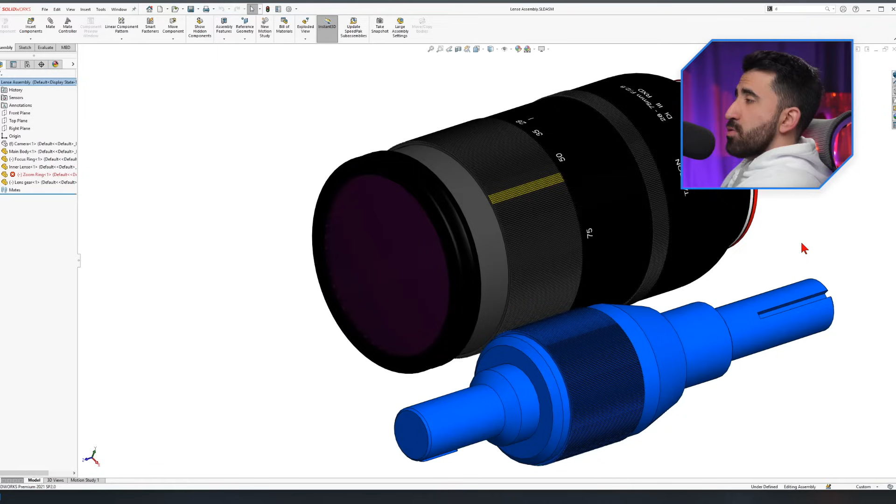Okay, let's go back to the video. Another point of clarification: you might see that I move my components in a smooth manner. It's because I'm using the space mouse from 3Dconnexion, and if you don't have that, it's fine—you can use the middle mouse key on your mouse and rotate it as well.

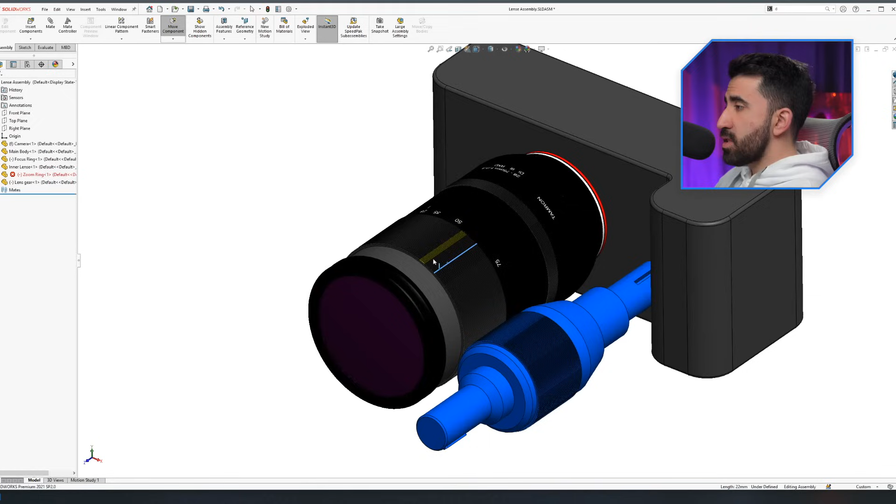Let's just make this part also shown so we know what we are going to do. This is a camera that I have designed and it's functional. The body is just a solid body, we don't care about that. This is the lens, which is assembled of 4 components probably, and we have a focus ring and a zoom ring that rotates. As it rotates, the inner part of the lens goes out and comes in, zooming the camera. I want to show you and teach you how to create an assembly like this. Also, to make things more interesting, I connected a gear to the zoom ring, so by the time you rotate this, it rotates the other one and the mechanism works.

First thing first, what is an assembly in SolidWorks? Unlike the part mode where you actually design a single component, assembly isn't about creating components. It's about adding relations between the already created components you made in part mode. So all you're doing is adding connections.

This is the main reason most beginners make the mistake of saving their assembly and sending just the assembly file to their professor, friends, or someone else to check. A lot of people on GrabCAD make this mistake—they upload the assembly file thinking the whole assembly exists in that file. No, the only thing that exists in the assembly file is the relation between the components.

Without the actual files of the components, that assembly file cannot be opened. So if you want to save it and send it to someone, you have to send all the single components you used in that assembly along with it. Or you use another technique, which is covered in this video.

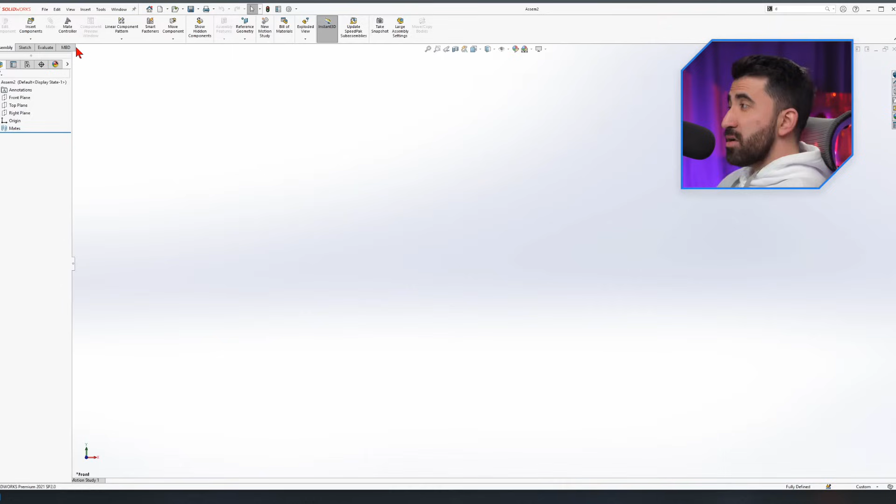This is the environment for the assembly mode in SolidWorks. It's a bit different from the part mode. We have some common tabs like Evaluate and Sketch, but the Assembly tab is now new and we don't have the Feature tab. We still get the front, top, right plane, and origin, and this time we have something called Mates, which is very important and crucial when it comes to learning assembly in SolidWorks.

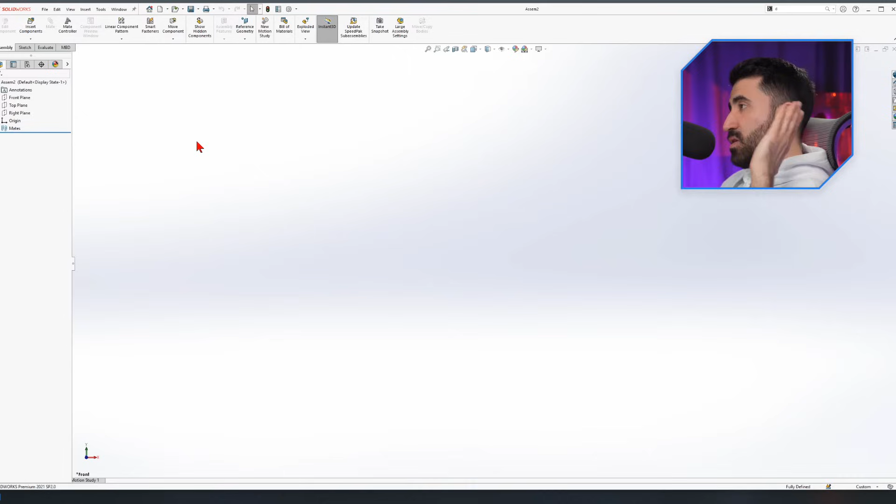Without getting you overwhelmed, there are a lot of icons here that we want to ignore, simplifying it for you as a beginner down to Insert Components and Mates. These are the very first tools you ever need to learn to get started with assembly. Later on, we keep adding other features to it and so on.

So we want to create this lens. Let's start by inserting the very first component. I can go to the Assembly tab and click on Insert Components. When I do that...

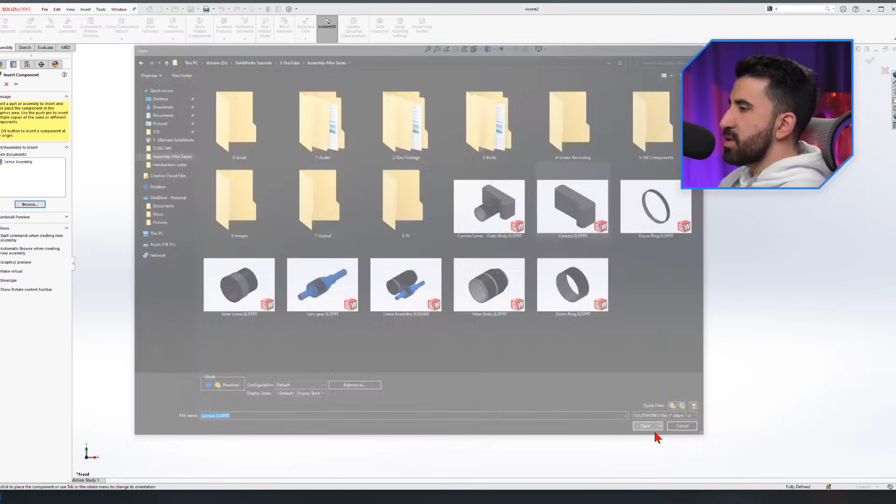I see there is one here, which is the whole thing. I want to insert the body of the camera. So I click on that, click Open, and immediately I see a big component attached to the end of my mouse cursor. When I move my mouse cursor—notice I'm not pressing any button on the mouse, I'm just moving it around—it moves with it.

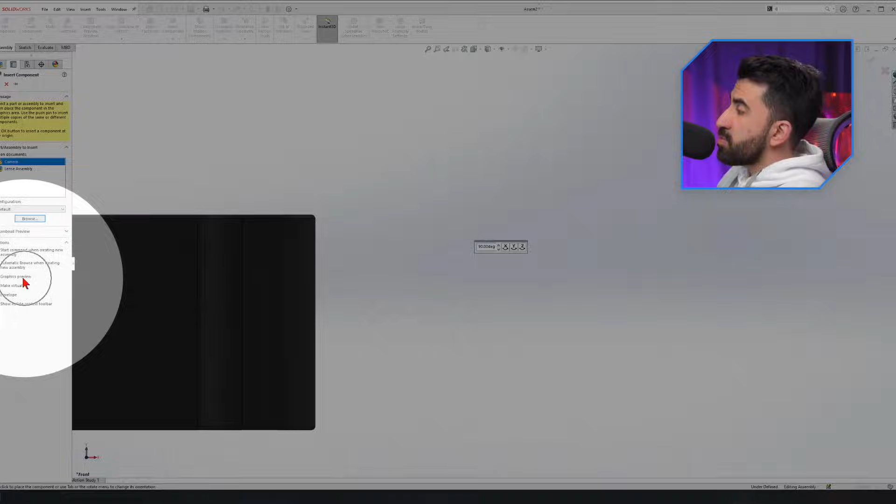If you don't see a component attached to your mouse cursor, it's because you probably haven't checked Graphics Preview over here. If I uncheck it, it doesn't mean it's not working—you just don't see the preview. So you do want to activate this.

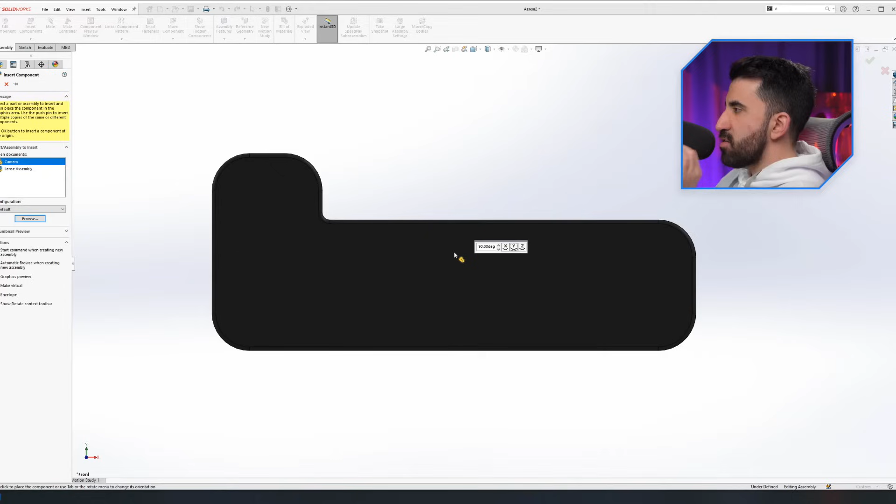I haven't clicked anywhere yet. Bear with me—this is a pop-up that allows me to rotate this component along X, Y, or Z, 90 degrees or whatever degree I define here. I don't want to stick to it, just whatever is fine for this example. Instead of clicking on a random point, which creates a lot of issues, I'm going to move my mouse to the green check over here and click OK.

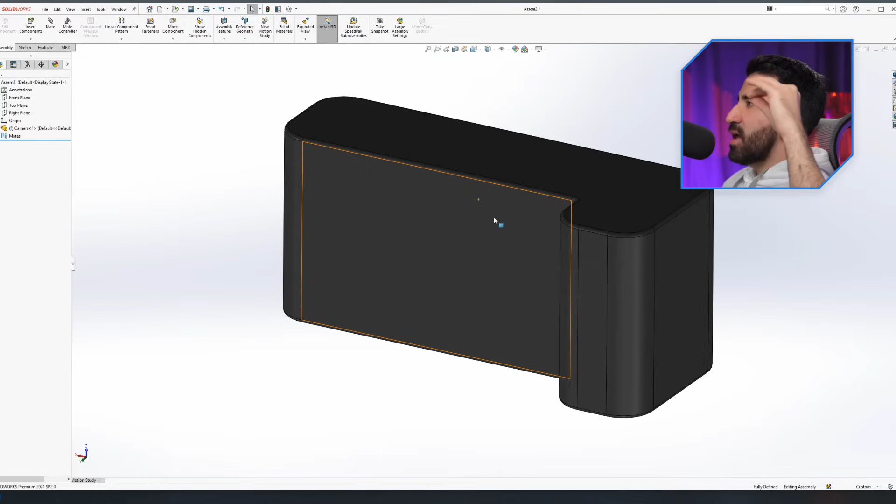By doing so, I have already set the very first component I insert in the assembly mode on the origin, which is how you must do it. Don't click on a random point. Clicking on a random point pinpoints your very first component on random coordinates in the assembly mode, and since you build everything else on top of that part, your assembly is going to be on random coordinates.

While you might think, what's the issue? There are some downsides to it that can show themselves along the line. For example, if you want a plane that cuts your components in half—if you don't know what I'm talking about, go back and watch my SolidWorks mini series in 5 parts.

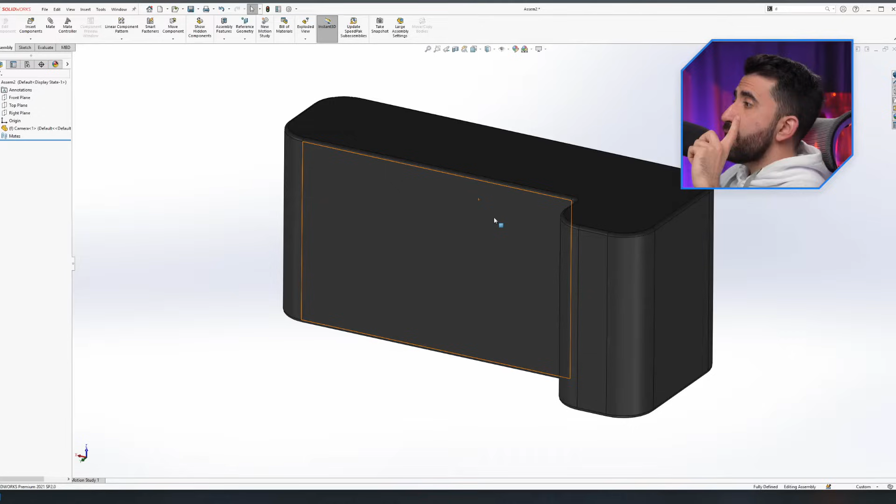I'll put the link to that in the description below if you've missed it. If you want to cut your component in half, you want your component to be on the coordinate system, because all 3 planes cut through the coordinate system. Unfortunately, this part wasn't designed in the right place, so it is not perfectly placed here.

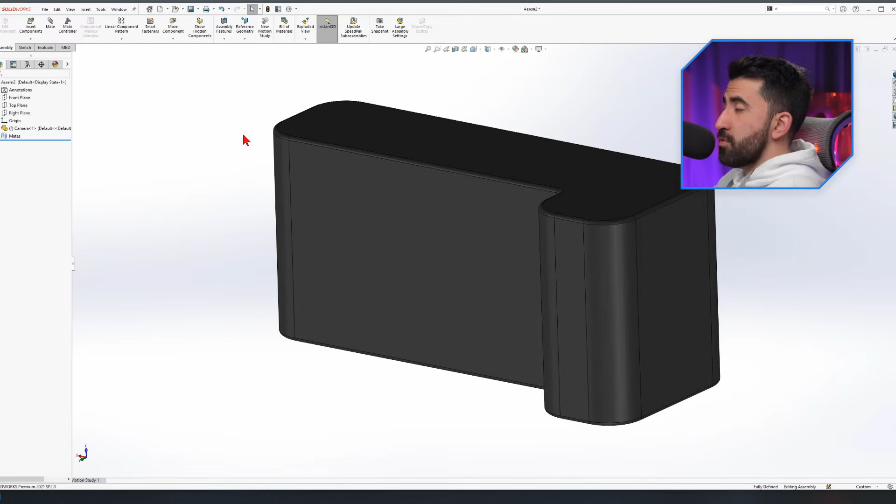But this is nevertheless what you should do. You should click on the green button for the first component. Now I'm gonna go ahead and insert my second component.

I go to browse. This time I'm gonna bring it's called main body. Bring main body, and this time I don't want to click on the green check because this is my second component, and I want my second component to be, for now, on a random point. So I just click here.

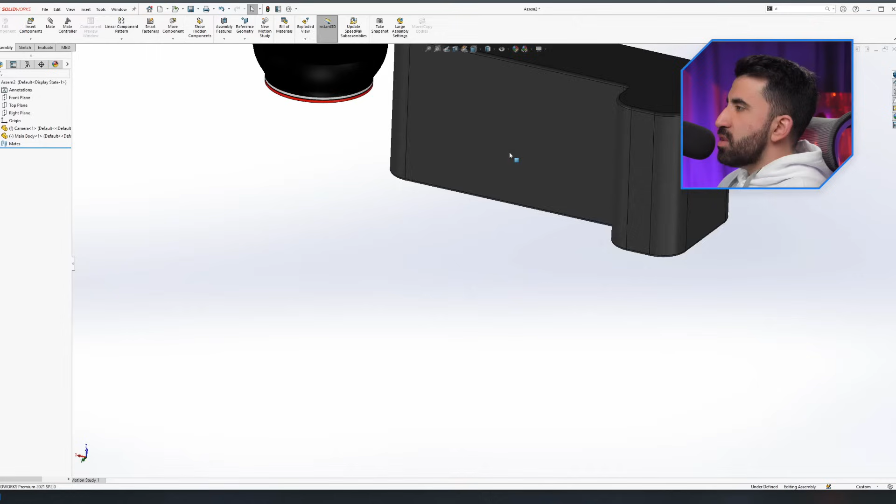Let's see what differences we can detect between these two components. First thing first, the name appears here. Camera, this is this one. Main body, which is this one, right?

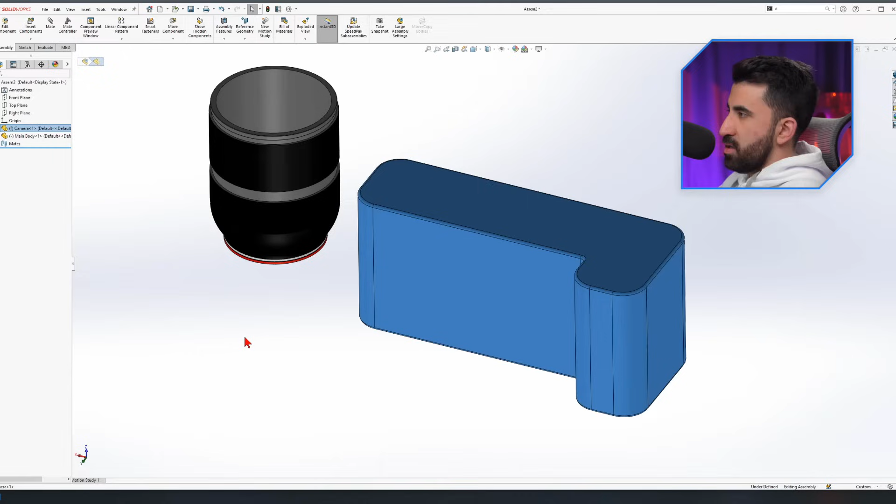And when we look here, there is a parenthesis for the main body, and it has a dash in it, unlike the first component, which has a letter F in it. Letter F appears for the components that are fully defined within your assembly mode, and they are fixed.

So when I try to drag my very first component by clicking and holding my left key on the mouse, a pop-up appears that says the selected component is fixed, it cannot be moved, period. But if I do it on the other one, it actually moves because it's not fixed.

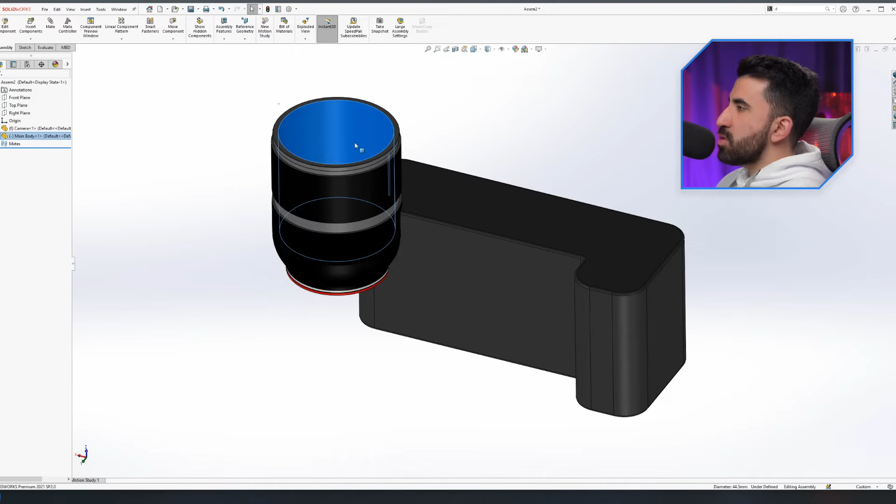I can right click on it though, click on fix, and the same on here, right click on it, click on float. Now I can move this and cannot move the other one, but I just wanted to show you how you can change that.

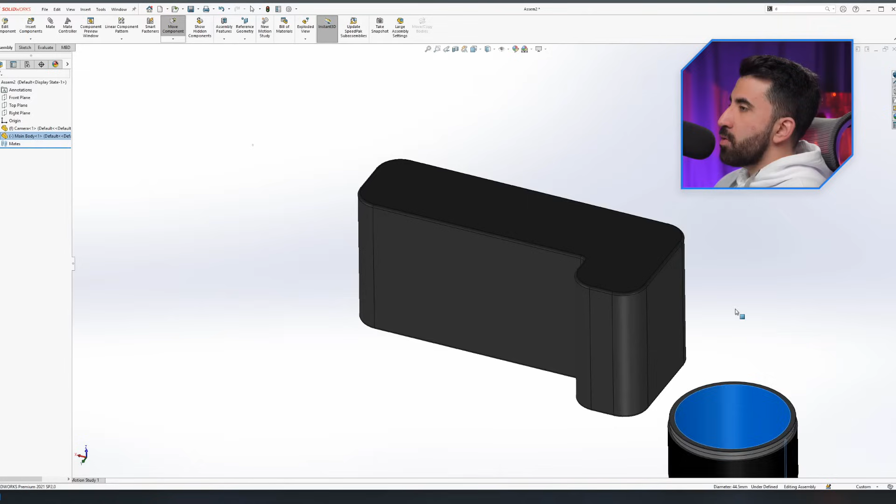We don't want to go down this route. It's something possible. Anyways, we want to know how to move the component in the assembly mode and how to drag them or rotate them.

Moving and dragging is the same. We use the left mouse key and then move them. And if you use the right mouse key, you will rotate them. If you use the middle mouse key, you will rotate the camera angle, not a single component.

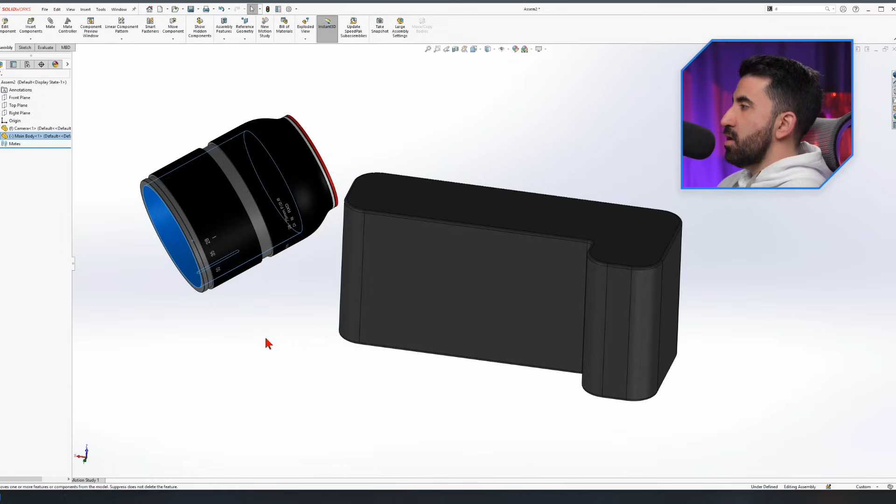And for those of you who are using a space mouse, if you click on that component, you can use your space mouse to rotate, move, drag, whatever on your component.

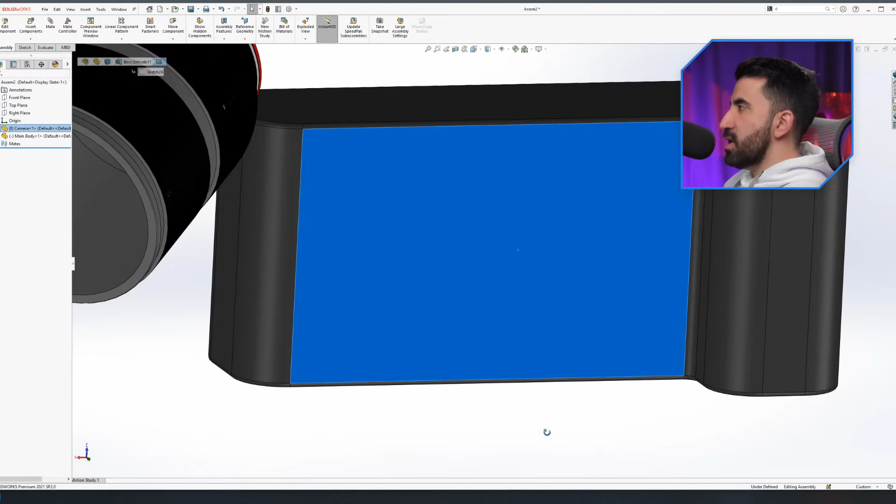I want to set or fix this red ring in the center of this highlighted surface. This is where we are going to learn the next step, mates.

As I said, mates are here. The second thing you need to learn in SolidWorks, the first one was insert component, and the second one was mate. When I click on that, allow me to close every segment we see here so we don't get confused.

Let's just say this is the menu for it. There are 4 main tabs, and on default we open the standard. Although there is advanced, there is mechanical, and there is analysis. In these mini-series, I'm gonna cover mostly the standard one for you.

We will use a couple of features from the advanced mates and a couple of features from the mechanical mates, and we're gonna ignore the analysis. Fair enough? Now, inside the standard mate, we have a subsection called mate selections, which is pretty intuitive.

You have to pick the first entity from the first component, pick the second entity from the second component, so SolidWorks can mate them together. Second subcategory is mate type. What kind of mate do you want to apply to these components?

And the third and the fourth, I'm gonna leave it for now. We don't want to go into these and make it complicated. So we need the first two, mate selection and mate type, all right?

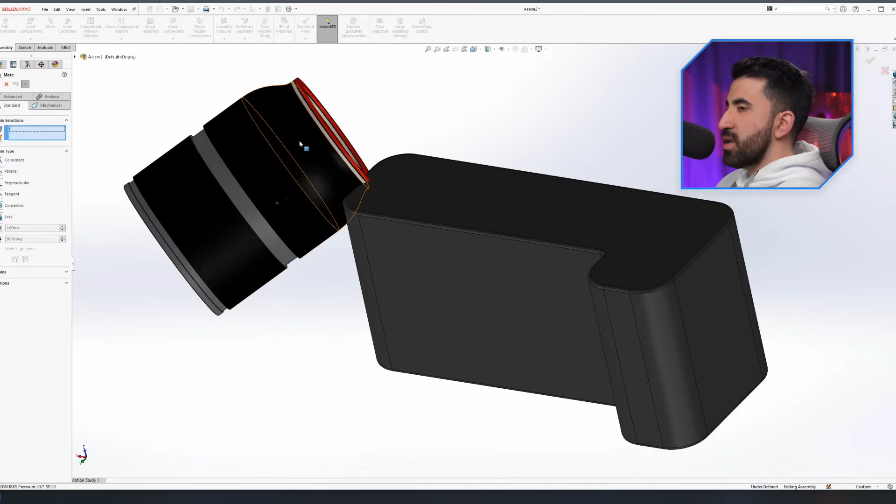You cannot select 2 entities on one single component. You cannot mate a component to itself. So what we do is we select, for example, I'm just running some examples here, all right?

Select the outer surface on this red ring, which immediately turns this whole solid body that I selected this entity from into a see-through component. So you know which component was selected.

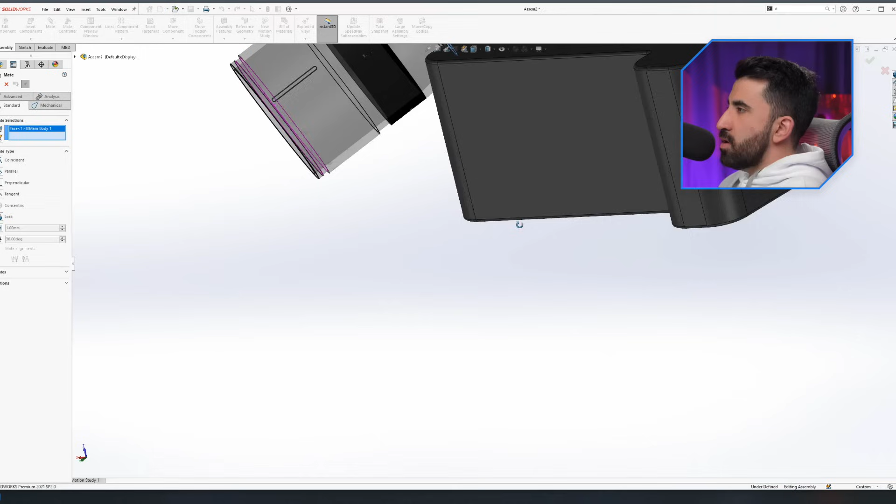And now I want to select this surface. As you can see, these two are selected, this one, and it immediately moved. And there is a pop-up that appeared here with some options in it.

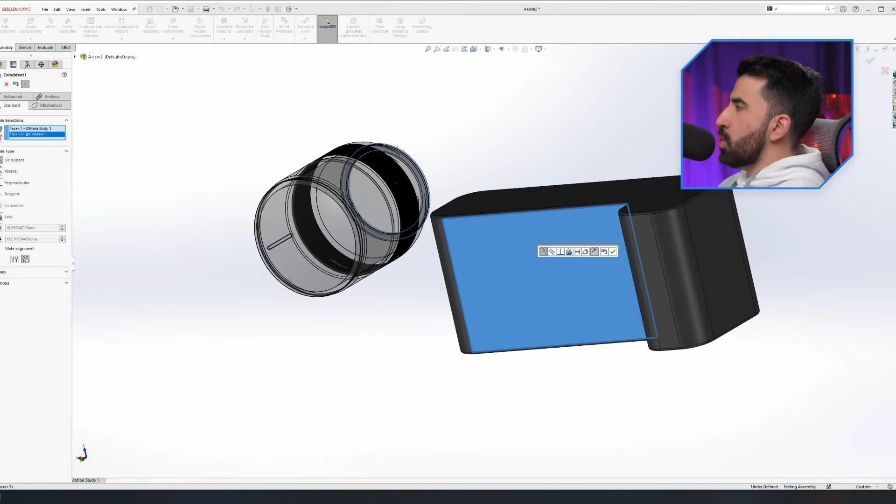And over here, some of the options that we saw in the mate type subcategory are grayed out, like tangent and concentric. Why is that? And why is coincident on default selected?

Let me just select these and press delete on my keyboard and repeat the process, and this time walk you through what happened.

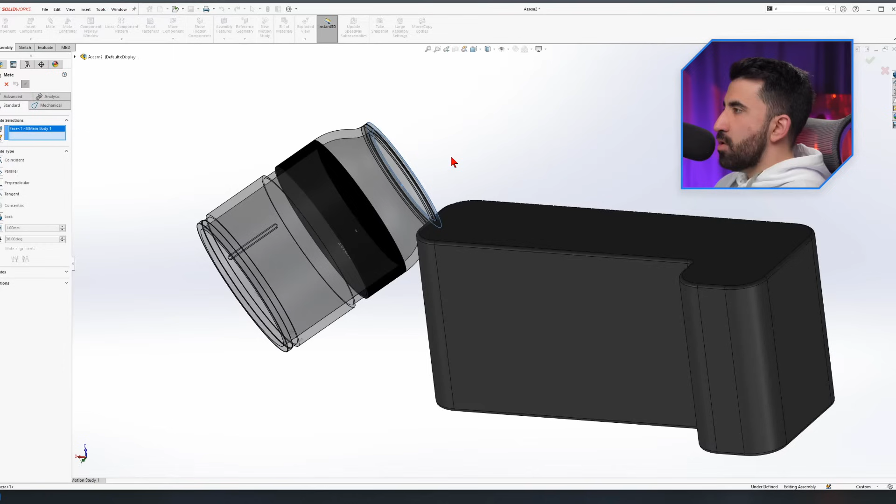So this time I'm going to select this flat surface, and as you can see, all the options are available except concentric, which is grayed out. Why is that? Because a flat surface, which is already one of the selections in this case, can never be concentric with anything. A flat surface cannot be concentric with anything.

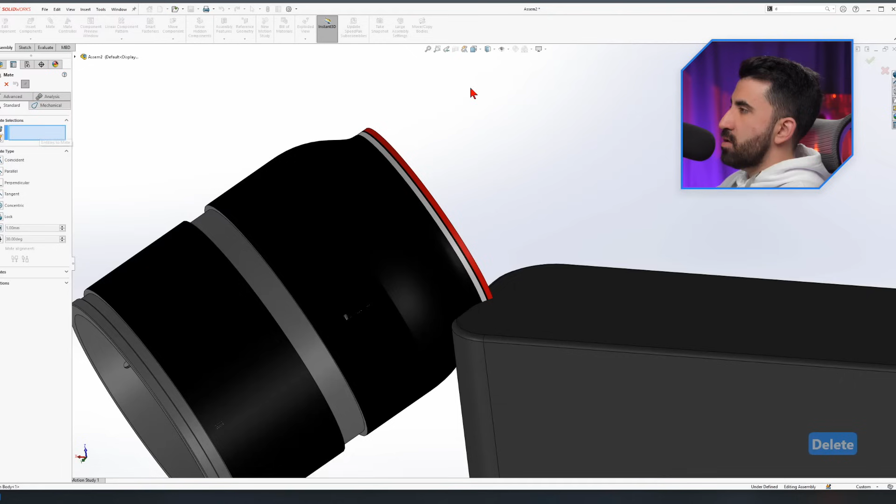A cylindrical surface, however, or cylindrical edge, they can be concentric. So let me take back my selection and this time select a cylindrical surface like this one, and you see all of the options are still available. I might want to assign a concentric mate.

Now, if I select the cylindrical surface on this one and select a flat surface on the other, coincident, parallel, perpendicular, concentric, as well as angle mates are grayed out. Because how am I going to make a cylindrical surface and a flat surface parallel to each other? Doesn't make sense, right? So depending on your selections, you get to use some of the mate types and cross out some of the others. Whatever remains here as an option appears here in this pop-up.

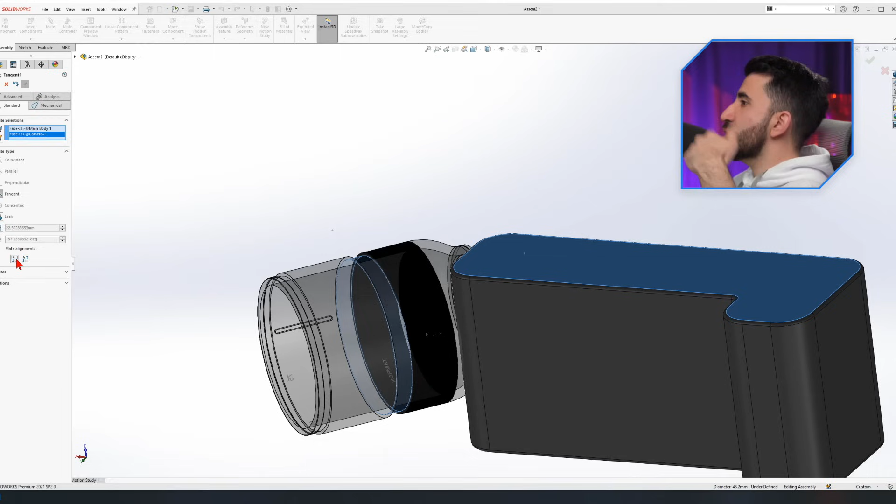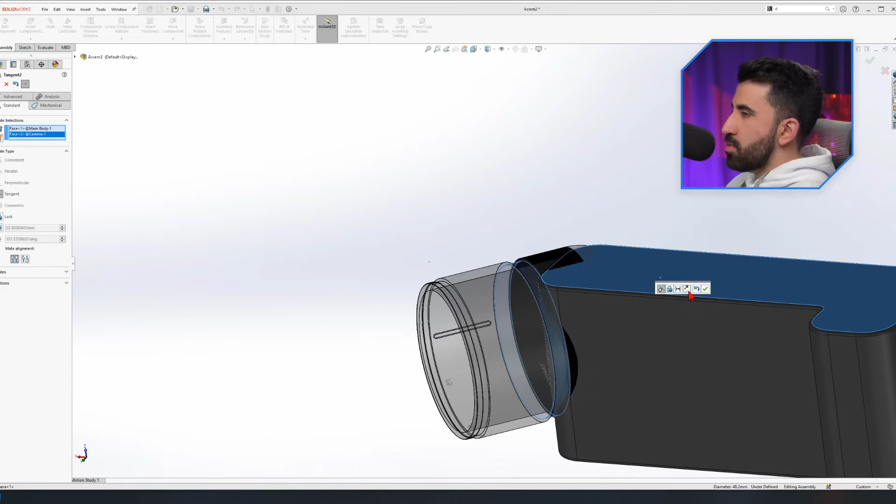Makes sense? The green is just to okay, accept it. And this alignment, let me click on this, which switches between the two possibilities of making these two selected entities tangential to each other, like this. It appears here as an arrow with a different symbol. Every other symbol appears the same, but I'm repeating it - the alignment appears as this arrow, so this is flip alignment. Same thing you see here - look, it switches, right? I'm talking about here and here.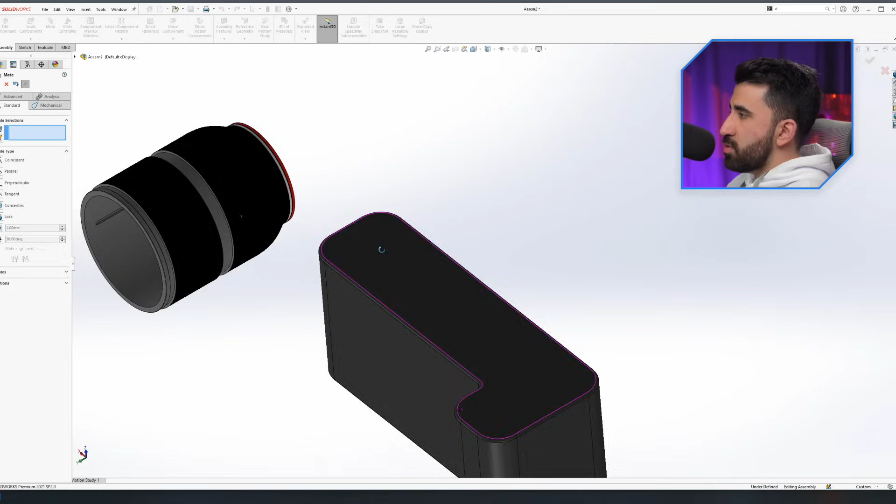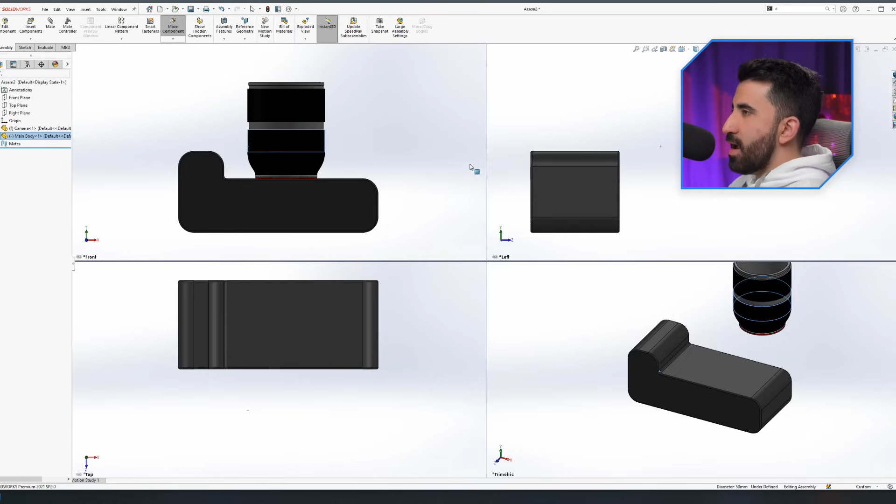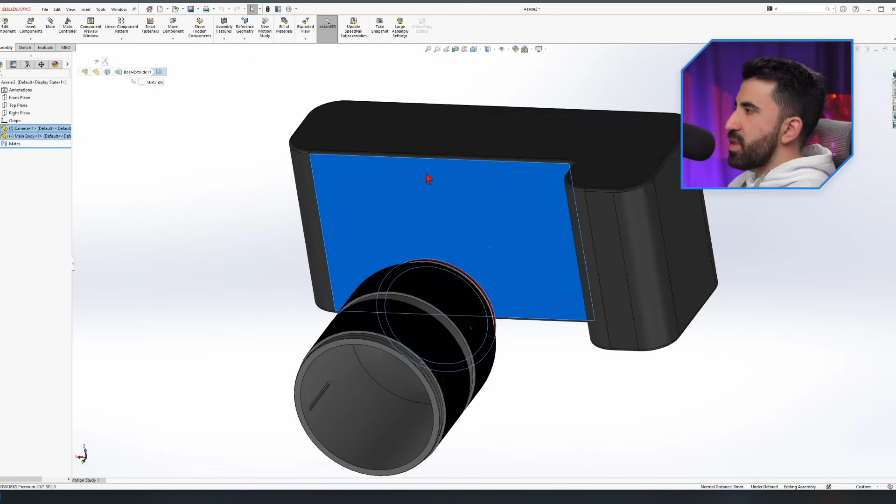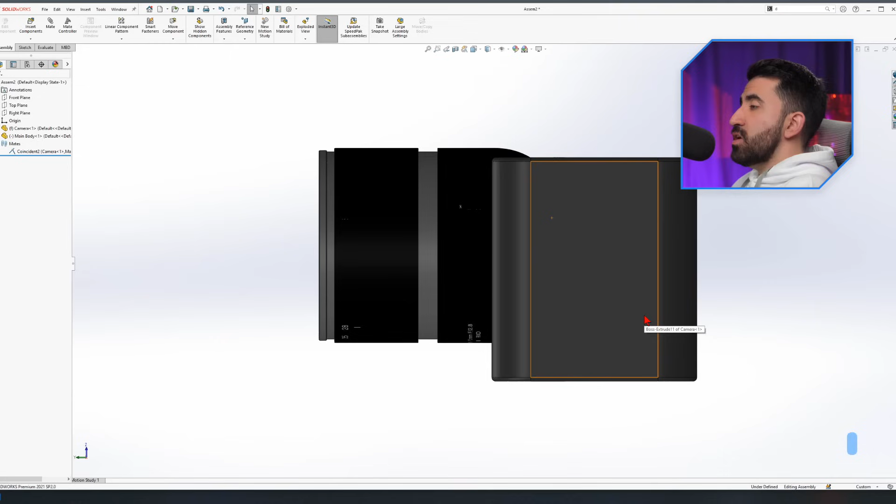So these two are coincident, they cannot be separated from each other. However, this surface can still slide on the other two free angles of freedom, and that's why it's still not fully defined, that's why we still can move it. Sure, what else can I do? What other mates should I apply to this feature, to this solid body, so that it stays in the middle?

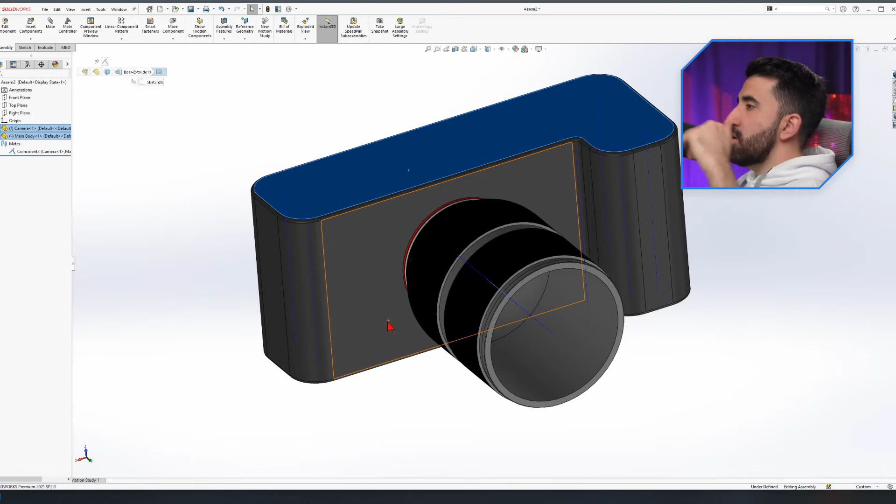One way would be to measure the distance between the center line of the cylindrical surface - let me show you, this cylindrical surface - and for example, this flat surface on the side, and another time, again, this axis to this, apply the distances so it stays in the middle, and we limit the other two angles of freedom. Sure, we can do this.

How? Mate, select this axis, select this surface, and go to the distance. Just click OK. Let's just say we want to be at 56. It moved. Click OK. And one time, we are still within the same menu, we don't need to go out. By clicking on OK two times, you exit the menu.

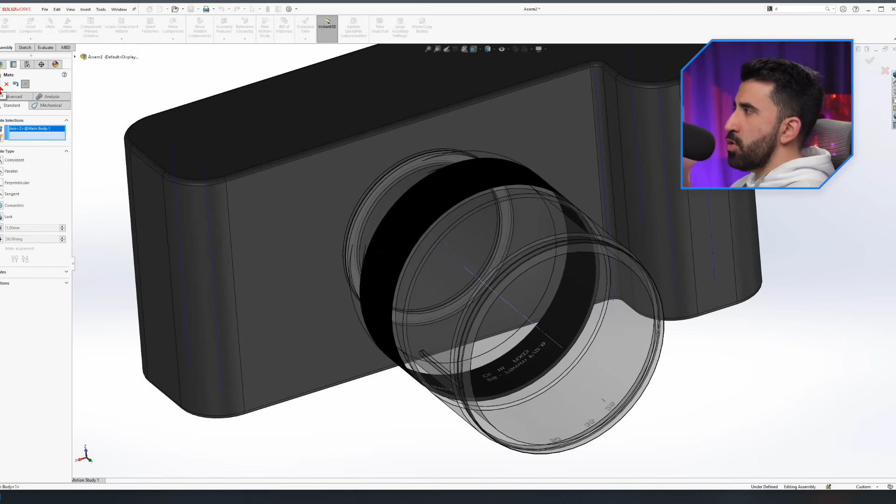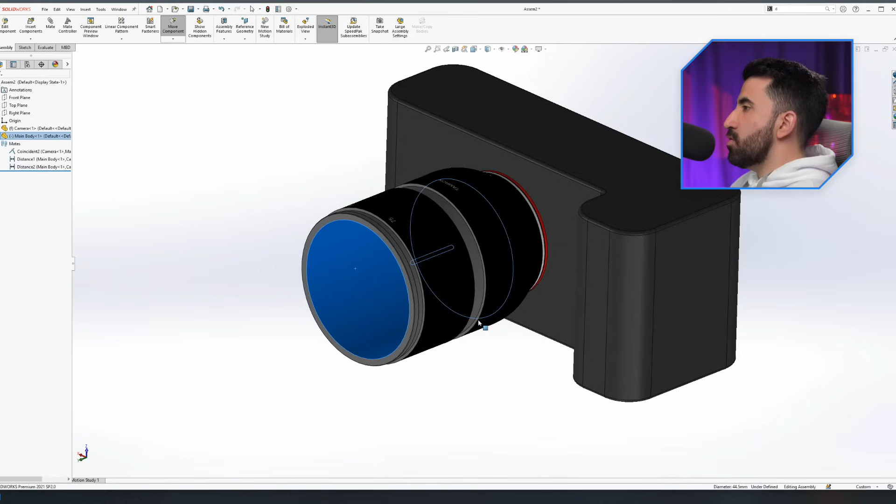And this one, again, distance, let's say we want to be at 29. It moves to 29. Two times OK, and we exit the menu. And this time, it only can rotate - see, we are eliminating the angles of freedom on the body of the lens. See what's going on here? That's the only way I can move it. I cannot move it back, forth, up, down, or sideways, but I can still rotate it.

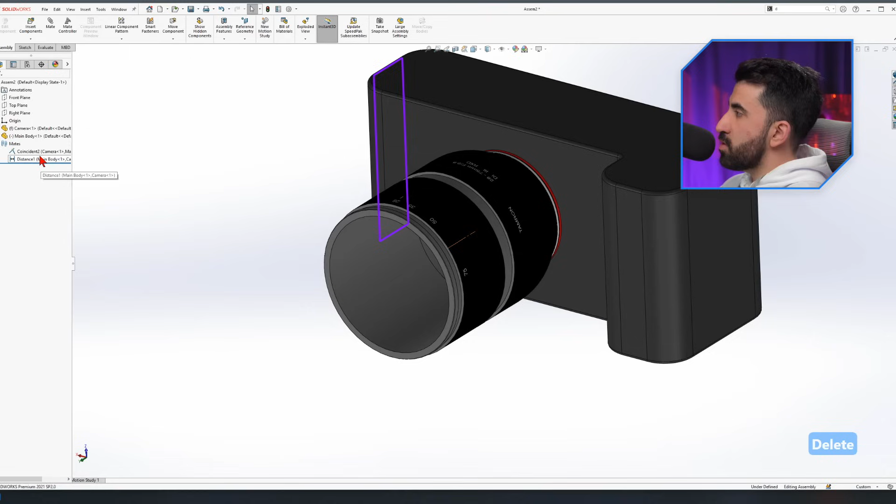Anyway, you keep adding new mates until your component is fully defined. But I was fooling you - this is not the right way to place a cylindrical component on the center of a flat surface. Allow me to just select whatever mate I have applied, make this part fully flexible, and show you the right way of doing this.

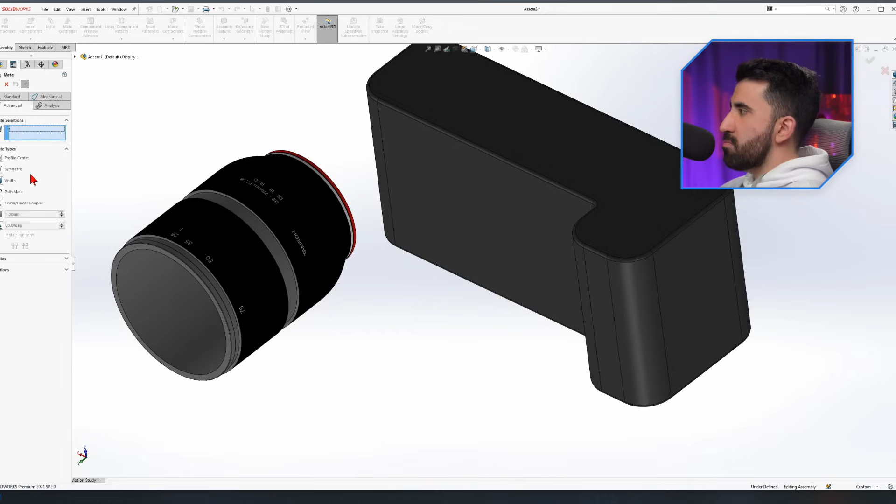When I go to mate, as I said, we are on default on the standard tab, which has coincident, parallel, concentric, so on and so forth. I'm going to go to the advanced mate, which gives me a different set of mates, and they are more capable. On here, I have profile center, which places a component on the center of the other selection.

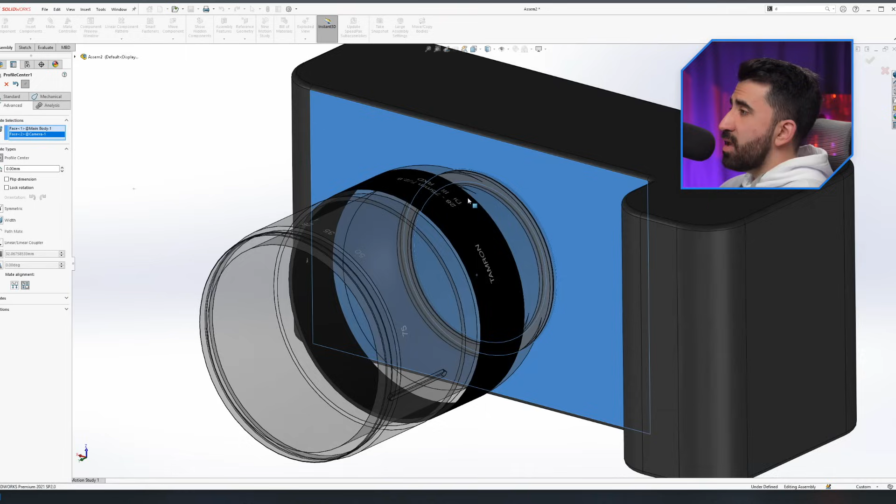So I'm going to select this ring, move my angle so I can see where I click, and select this one. It just places it exactly on the center of this selected highlighted flat surface. If I go ahead and click OK, there is no need to make it coincident and apply the distances and so on and so forth, but the lens can still be rotating.

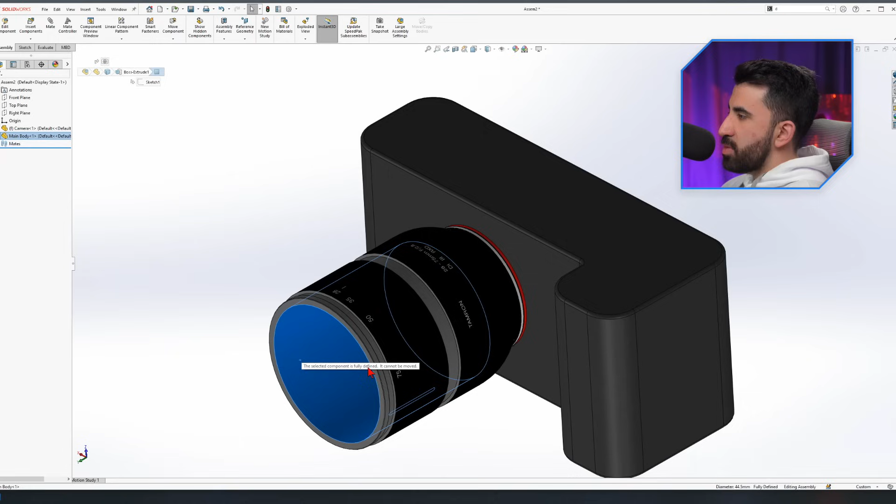So to stop that, I have a button here, or checkbox, lock rotation. If I do that and click OK, now this component, just like this one, cannot be dragged because it's fully defined. You see the pop-up, right? Look at the pop-up here.

Now, this is the very first component we just inserted. Allow me to bring the other components a little bit faster. So we have the inner lens, we have the zoom ring, and we have the focus ring.

If I wanted to delete a component, all I had to do was select it and press delete on the keyboard. If I wanted to duplicate it, bonus tip: hold Control on your keyboard and drag it, let go of your mouse key and let go of your Control key. Now you have two of them, which I don't want.

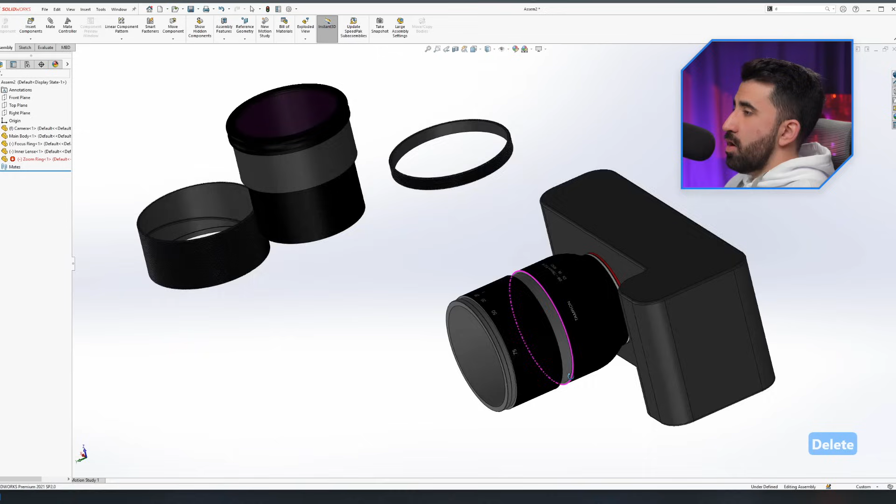Now I'm going to place this component on this one, like this, and select these two to mate them together, and they're already mated.

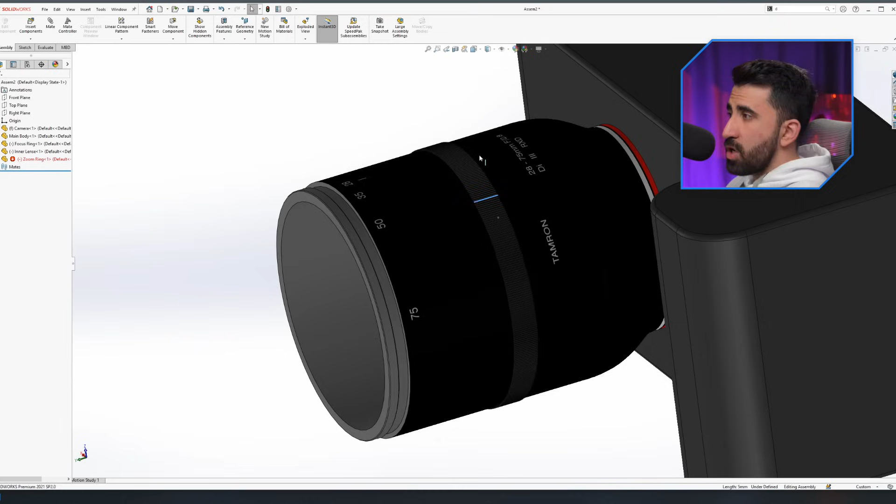Now you might be wondering how I did it so fast. I didn't even go to the mate menu, I just used some shortcuts, which you will be learning, not in this series, this is a little bit advanced. I just wanted to demonstrate the possibilities of working faster in the assembly, because I'm taking it super duper slow right now. So let me Control Z back.

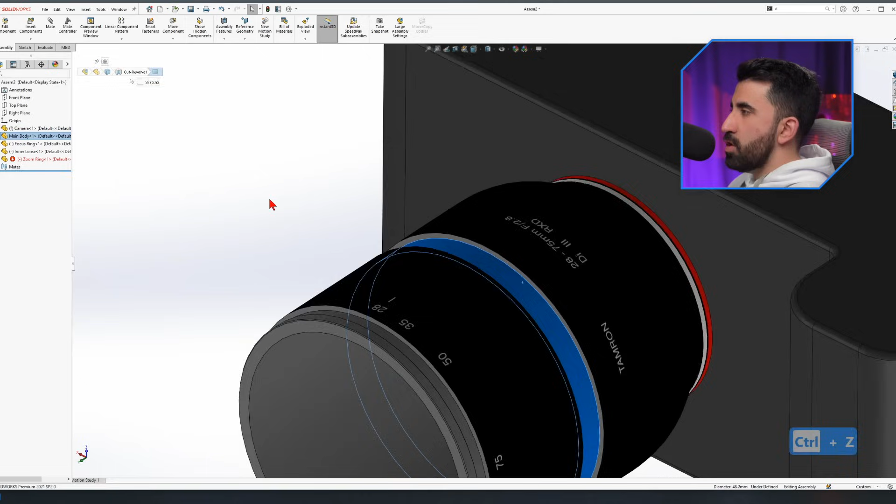Now I want to place this ring here. What do we do? We go to mate, select the inner surface, select the outer surface, and first thing first, we make them concentric. I don't want to lock the rotation because this is supposed to be rotating, so just click OK. And I want to push this surface to here and click OK. Look what happened — the ring is in its position and it can rotate.

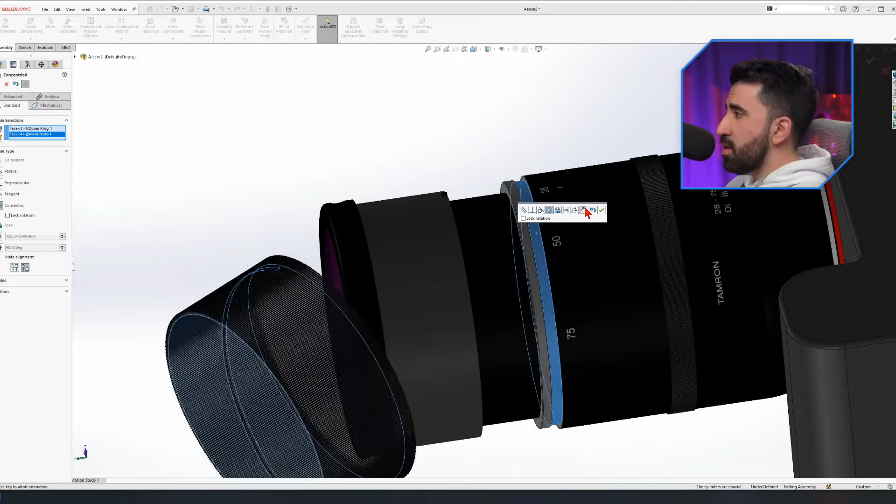Next, we want to place this one inside here. How do we do this? Mate, select, OK, which is a right click in this case. And we have this one, which is supposed to be here. The alignment is wrong, so I'm going to flip the alignment and click OK. Let's move this out — oh sorry, the alignment was right.

How do I go back? Good tip: a lot of times you assign a mate and realize you made a mistake, now you have to go back. In this case, since we haven't used a lot of mates, only five, I can just find it. This was the mate I was looking for — sorry, this one. I can right click on this, click edit feature, and flip the alignment over here. That's fine, but sometimes you're working with a huge large assembly with thousands of mates, and finding a single mate among thousands is not only difficult, it's close to impossible.

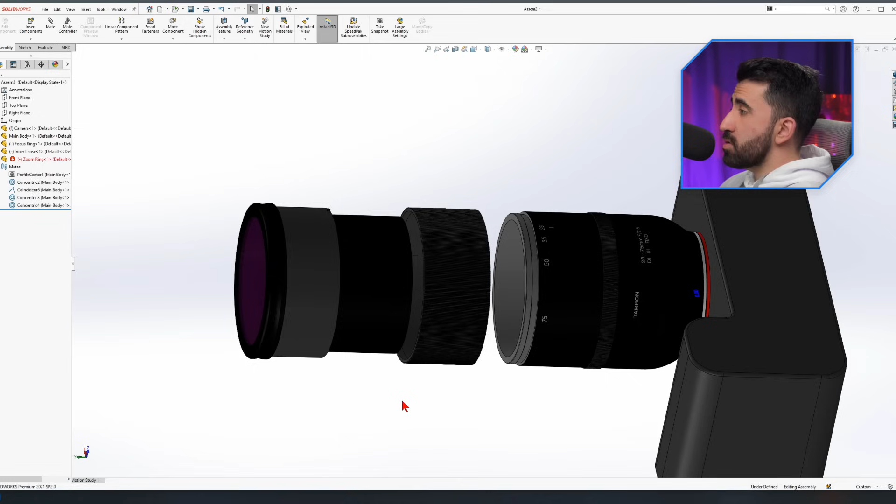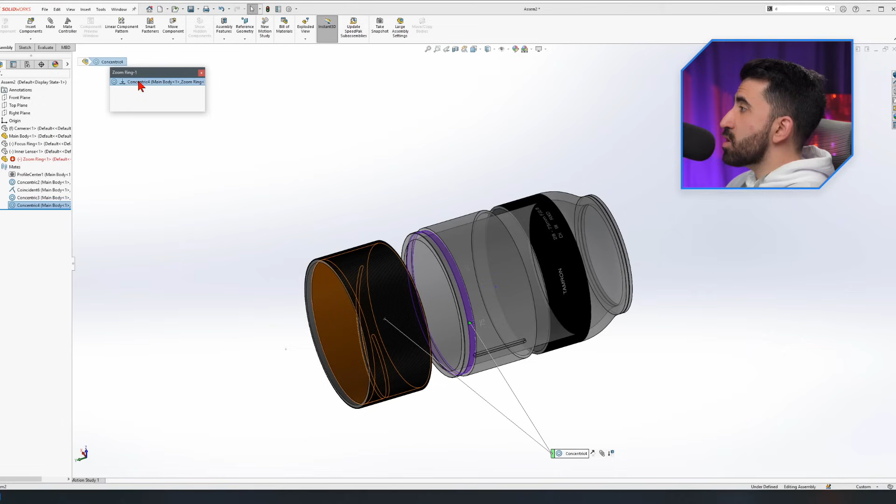So how do you do that? When you want to know what kind of mates are applied to a single component, you right click on that component — because this is the component in question. When this menu appears, you go to this icon, view mates, which is a paper clip with an eye on it. When you click on this, the only mate assigned to it and the only component mated to it appears, everything else disappears. So we know this is concentric number four, highlighted also here. We right click on that, edit feature, and we can easily flip it like this. When we flip it, click OK, and close this menu so every other component appears back on the screen.

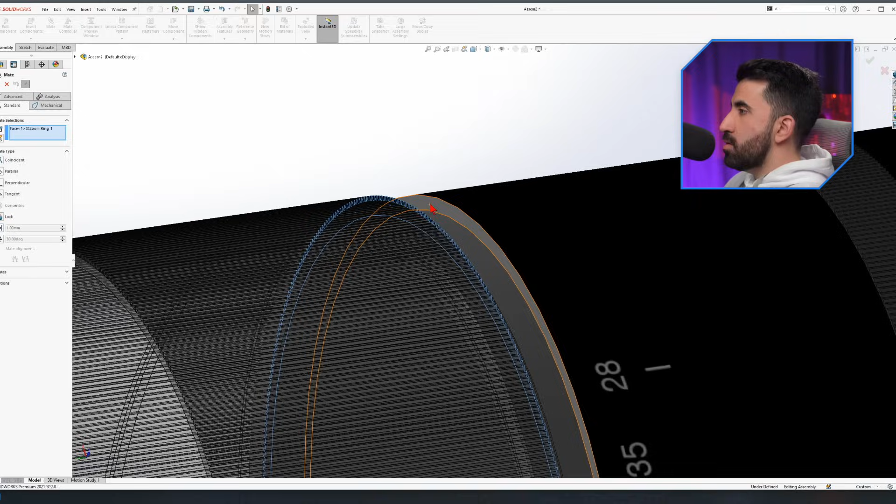Now I want to select this surface and this one, so it goes here, and we're cool for now.

I want to stop this video right here because the next component has to have a function. I want to assign them in a way that by the time I rotate this zoom ring, this part goes back and forth. Make sure to download the components and try to watch this video, do it with me, because once you do it, you'll never forget it. You'll learn it for good.